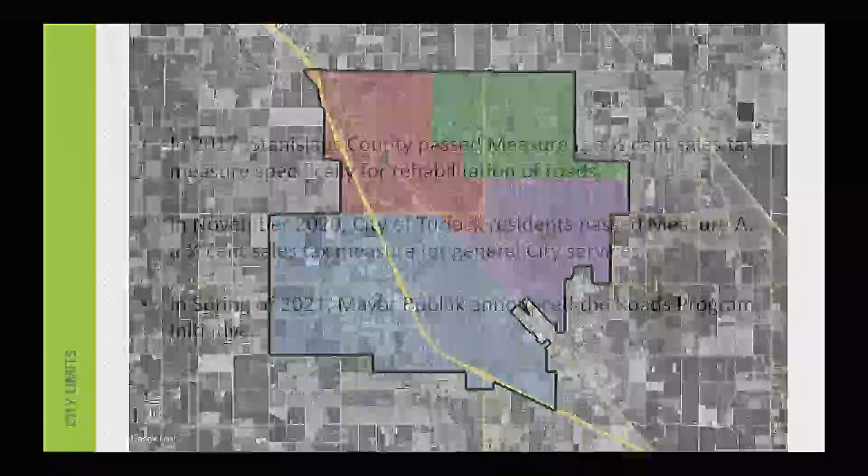So a little background here, simple history: Measure L passed, Measure A passed, and that basically gave the city a revenue stream to start planning on fixing the roads. Mayor Bublak announced the roads program initiative in 2021, and within a few months, I came to the city to take over that program.

As part of the overall approach to fixing the roads, first of all, you need to have some sort of basis for selecting your roads, some way to plan how you're going to attack fixing them. The database that we use is Street Saver. It has a whole bunch of information in it, and I'll show you a few screens so you can see what kind of information is available to us as far as planning which roads to actually fix.

The database was last updated in 2013, so the roads fell apart in the meantime. Obviously you've all seen that, so we needed to update it. The city hired a consultant to do a survey of the entire city network, basically all the streets in the city, and they used LiDAR.

LiDAR is basically a laser technology that collects data. If you process all the information it collects, you can develop a 3D image. That is used for survey purposes. It cuts down the amount of field survey that the designer needs to do during the actual design of the streets.

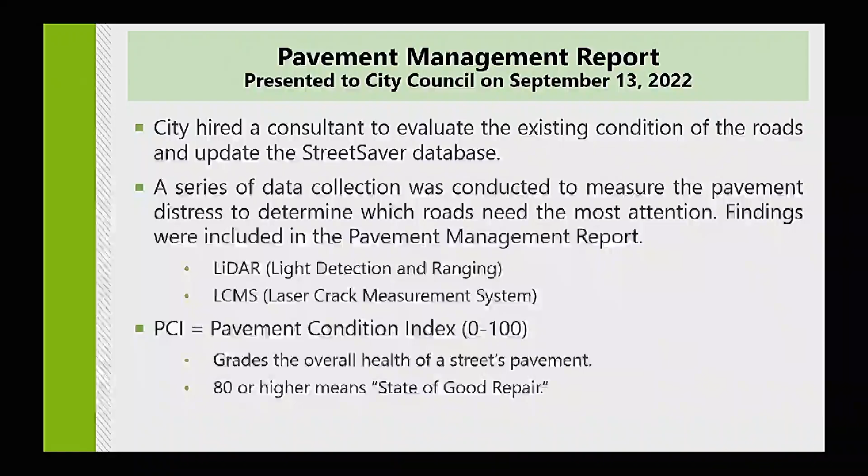LCMS basically takes photos of the surface of the road, and I'll show you a picture so you can see the network of cracks on the surface of the pavement. That is the basis of assigning a number, which is a pavement condition index, from 0 to 100, to each street. Now, streets are not— I'll get into that. You'll see it's a little bit more complicated than that.

This is LCMS. You can't really see the street that well on the lower right, but there's a pattern of cracks there. The picture you see is looking down vertically on the surface of the pavement, and the colored lines you see are the crack patterns. Different colors show how wide the crack is, so the engineer looking at this gets an idea of how cracked or deteriorated the pavement is.

There's a program that goes along with this that automatically analyzes the overall condition, and together they can assign a pavement condition index. A lot of this is also verified by the engineer by going to the site and making sure the data is back-checked, and that it makes sense in the field based on the actual condition they see.

As part of the same contract to update the city's database, the designer also designed these 15 streets. If I go into Street Saver, this is the first screen I see—it's a dashboard giving a whole bunch of general information about the city's network. Let's take one street that we did, Wayside. It runs from Olive to Pioneer.

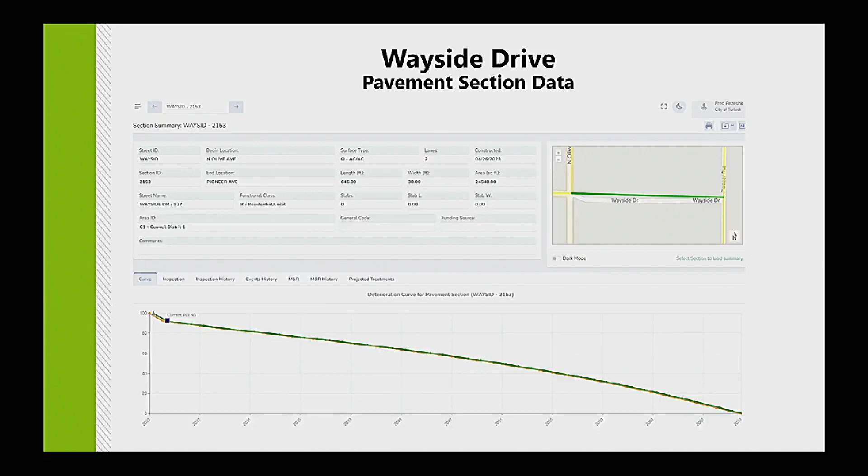So this is a little bit of a close-up of the same table, and you see the type of information that is there. There's a section ID, begin and end information, the type of pavement that we have, asphalt, concrete in this case, number of lanes, and top right you see constructed 4/26/2023. That's when the road was paved, and I updated the information as far as the condition of the road based on it having been paved.

So this is another screen that I can have in Street Saver, and it's projected treatments. Remember that curve? It basically says if the condition of the road is this, the program predicts that in so many years you need to do this.

And I'll show you a little bit of a close up here. Remember, it was done in April 2023. At that point, the pavement condition was updated to 100. That curve now projects that in 2024, this was done a couple of days ago, the pavement condition is down to 94. Now keep coming down, and you see that if we do nothing to the road, the pavement condition starts to come down. Well, the road deteriorates, it ages, so naturally the pavement condition index comes down.

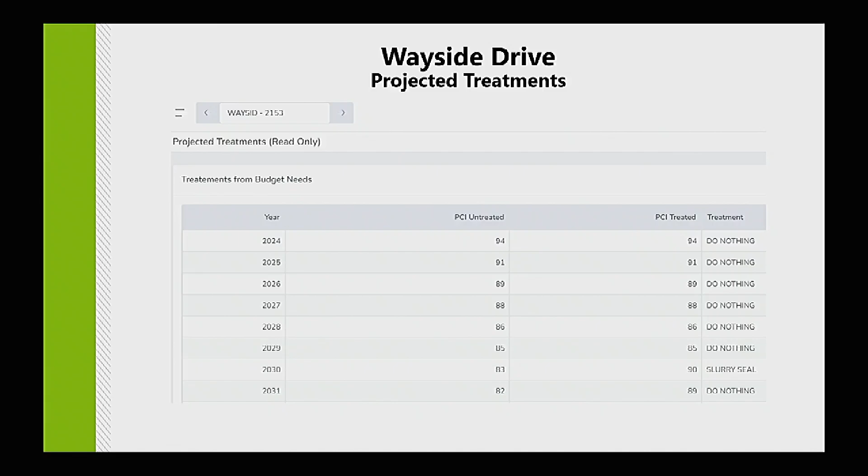So it's not me sitting there keeping track of that the old-fashioned way on a piece of paper. No, all the data is here in the database, and it automatically can be generated and updated. Question that has come up a few times, and I've answered this a couple of times during the council meeting, but a lot of you probably have not been at those council meetings. How do I approach the selection of a road to fix?

Based on the council's direction, residential areas in districts 1 and 2 have priority, simply because of the poor condition.

A year ago, my challenge was not which road to do necessarily, or how to pick them. It's where do you start, because so many of the streets were in basically the same state of disrepair.

So as a general approach, I look at the PCI, pavement condition index, for different sections of a road, then I put the PCI together for the entire road. Remember, Wayside had 5 sections, so one clue is if 1 or 2 sections are really in bad condition.

Now I look at the entire road and see what the condition is for the rest of it. I also look at the condition of adjacent roads in the same vicinity, crossing roads, parallel roads. The idea is, if we're going to fix a road in an area, can we bundle together 2 or 3 other streets in the same area and make them into one construction contract?

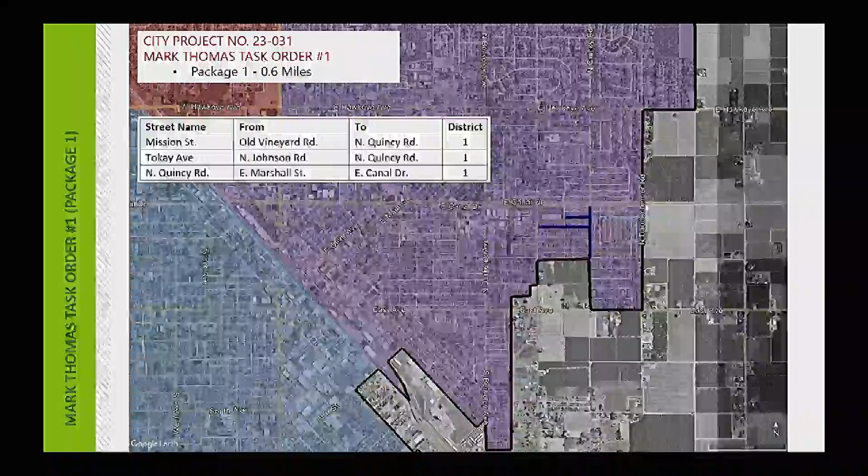The first consultant, Mark Thomas, divided their streets into 2 bid packages. A bid package is basically what a contractor bids on, and you can have different contractors for each one. The first bid package they developed is for the streets south of Canal, the other one is for streets north of Canal.

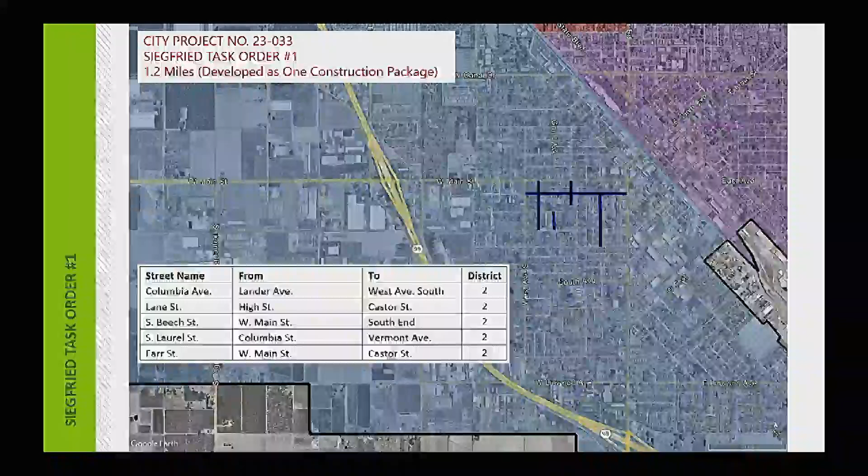The second consultant developed everything into one bid package, same thing with the third consultant. So we ended up with 2 bid packages for the first consultant, 1 each for the other 2, for a total of 4 bid packages.

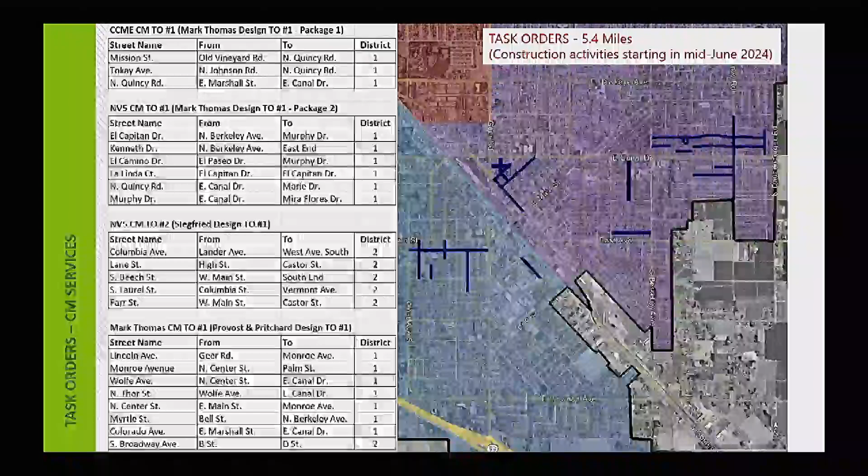Now, these are the same 22 streets, presented a little bit differently. You see them on the map. On the left side, you see 4 tables stacked top to bottom. Let's pick the second header. It says NV5, the CM firm, the construction management firm overseeing construction of those streets listed in the table. In parentheses is the name of the designer, the firm that designed the plans and specifications for these streets.

We also took the Geer Road rehabilitation to the council last year, in August already, time flies when you're having fun. We took it to about 30% design, because we wanted to see what we were getting into and present those plans to the public. So we held a public information meeting on April 17. We had plan sheets all over this room and made a presentation to the public. Only 12 people showed up, that's my excitement here, to see a lot more people.

After that, on May 28th, we made a similar presentation to the city council, and we're ready to go back with the task order to do the final design for Geer Road. We've applied for grant funding based on the design schedule and hopefully receiving grant funding to supplement the monies we already have for the project. We're looking at mid to late next year for advertising for construction.

This is Geer Road in all its glory, 2.6 miles from Golden State Boulevard all the way north to Taylor Road.

Design has to continue. Lots of streets to design and put into the system, to advertise for construction, to construct, and to oversee the construction of. So this was the next round of design, for a total of 12.8 miles of roads currently in design.

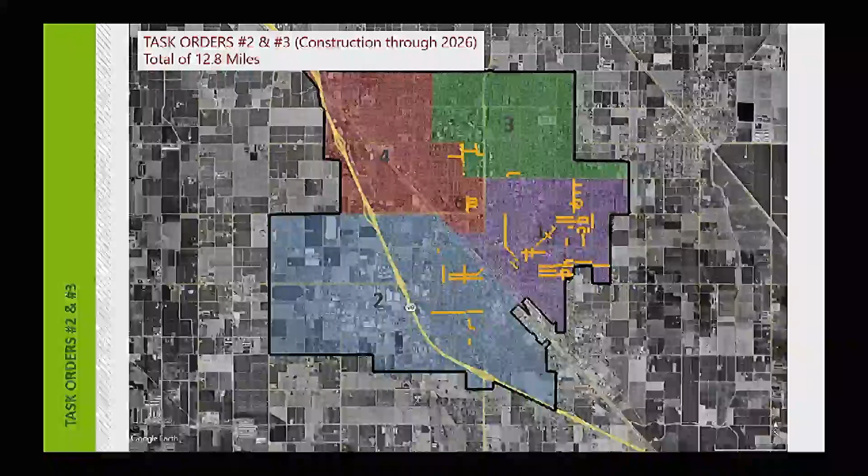Did you find yourself on the map? I can hold until you find yourself. Yeah, we can talk about that after the presentation, or I can give you specific information. Absolutely.

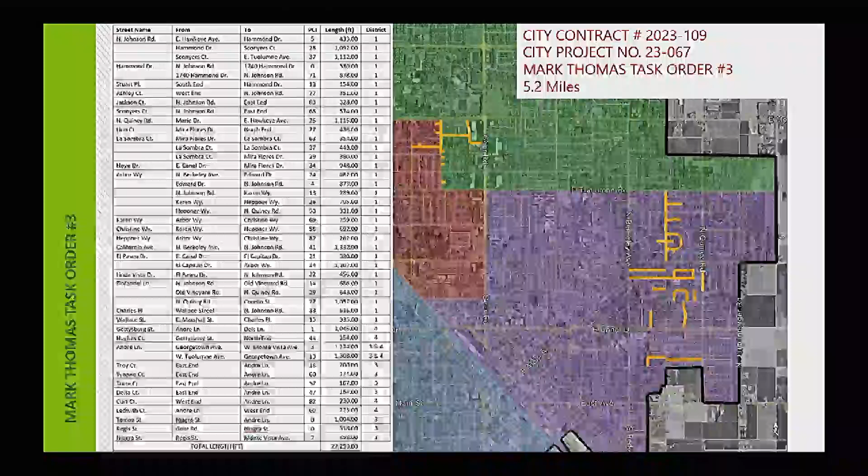So remember, we have 3 design consultants. These are the streets that one design consultant is designing right now. If you look at the top left part of the map, that's the Andre Lane area. Streets in that area are going to be expedited for advertisement for construction this year, because we want to get those done ahead of Geer Road construction. So that's Regis, Tenino, Niagara, Gettysburg, Andre Lane, and all 6 cul-de-sacs off Andre Lane.

And these are the streets that the second consultant is going to do. If you can see that little L-shaped street in yellow, that's Meadowlark, at the corner of Tuolumne and North Olive. And then you have the Donnelly Park area. Those streets, again, are going to be expedited this year, so we can be done with those before Geer Road construction starts. Again, it's that timing, the sequencing you have to do, an eye on future projects. What do we need to do a little bit faster than the others, to basically clear the area so you don't create congestion of construction in one area?

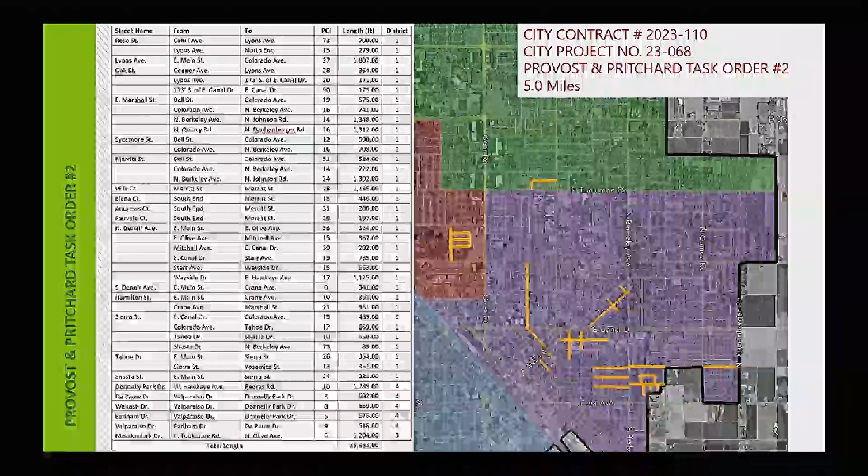And the third consultant has these streets to design, and that's what they're doing right now. So where are we with the roads program thus far? Remember the 15 streets? These are the 15 streets.

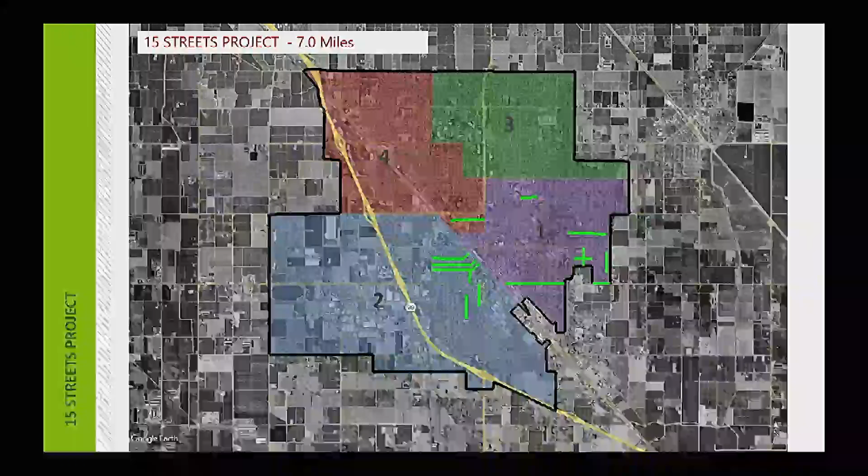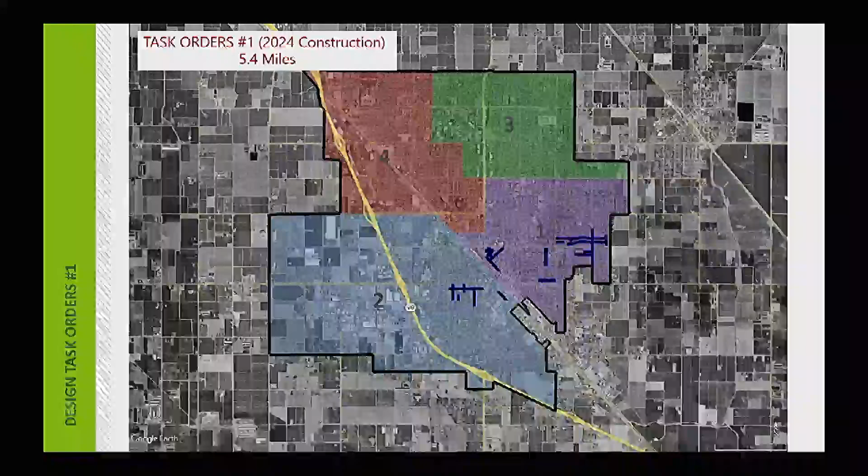Oh, here we go, I went too fast. These are the 22 streets we talked about, the ones that are going into construction. We've had the pre-construction meetings with the contractors. So 3 of the bid packages are going to start on June 17, the next one on June 26.

When we say construction is going to get started, folks in the neighborhood are going to receive a notification that construction activities are going to start on these streets. It doesn't mean the contractor is going to be out there working the first day the contract starts. They have a window per contract, from this date to this date, given in the notice. During that window, they schedule their work. The first thing they generally do is all the concrete work, any curb and gutter replacement, any impact on sidewalks and driveways, curb ramp construction at the corners. They'll do all of that first.

Then they come in and do all the road work that is necessary as far as the pavement.

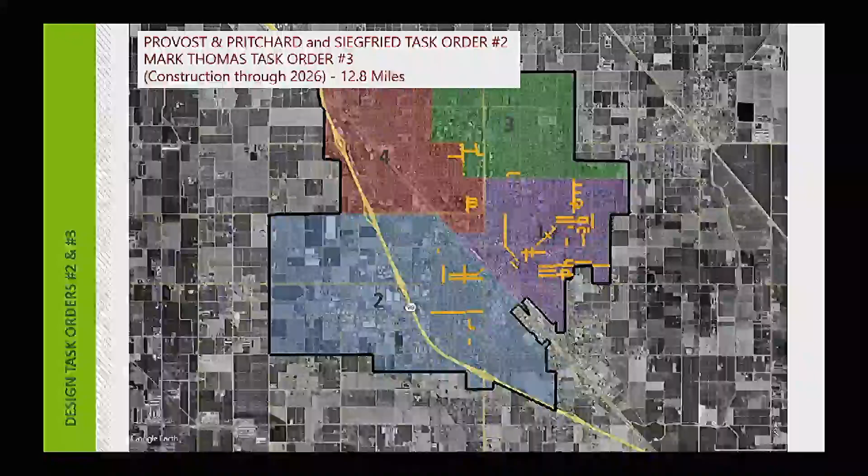And then we have the Geer Road that we went over, and this is the last batch that the council just approved a couple of months ago for design. These are in design right now for construction as the packages become available. There are 2 bid packages that we want to expedite later this year ahead of Geer Road construction. And the same maps overlaid here together for a total of 27.7 miles in either constructed, to be constructed this year, or ready for design and construction through 2026.

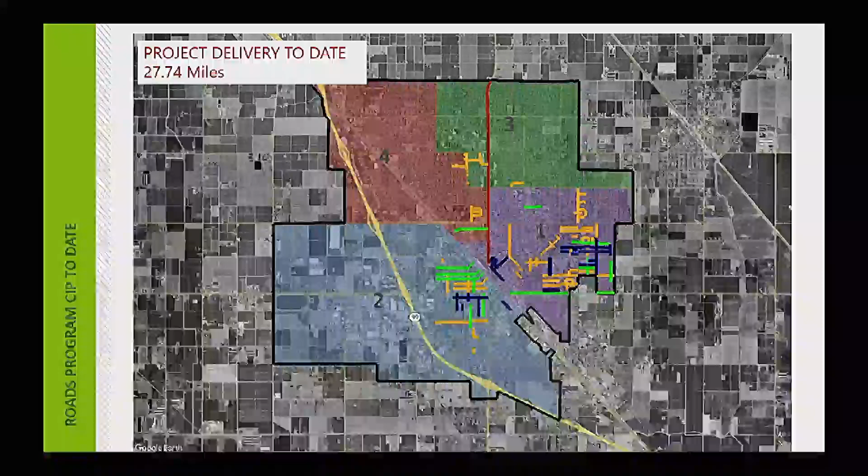Email works generally better because it gives me a chance to look into your question and give you the full answer. But when you look at this, every roadway has a classification based on the amount of use, the importance to the overall network, how much traffic it moves. At the top is arterial, like the arteries in your body. The most amount of traffic is accommodated. These are generally higher speed and more number of lanes. So we have 3.77 miles of arterial, constructed or in design, and 6.58 miles of collector.

And you go towards the bottom, you see 17.38 miles of residential. Remember what I said at the beginning: the council's priority was District 1 and 2 residential priority. It doesn't mean that we cannot do other streets. As you can see, we have done other than residential simply because you need to move traffic. So as we fulfill the council's direction to focus on districts 1 and 2, we are not losing our focus on fixing arterials and collectors so everybody can have the benefit of being able to move through the city.

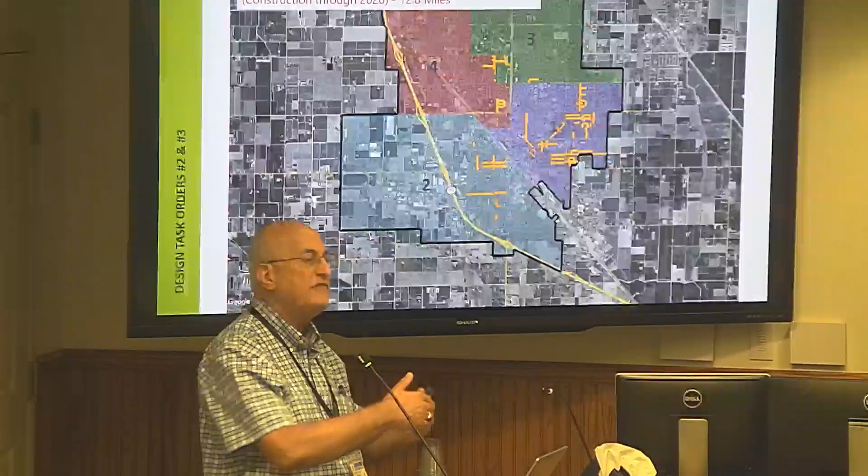But for all of these projects overall, we expect them to be done sometime around this time in 2026. The reason I say that is the sheer number of streets - we might run into the weather at the end of next year, and the paving might be delayed to 2026. Yes, ma'am.

Yes. Yes, you can go there. It's not live, so we have to go back and update the information. Yes, we continually update the roads program webpage.